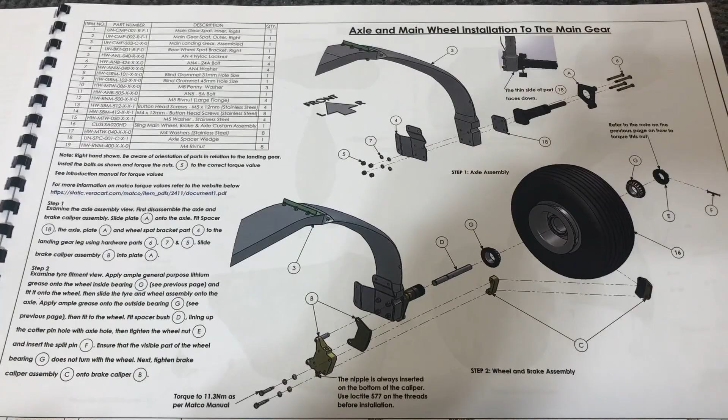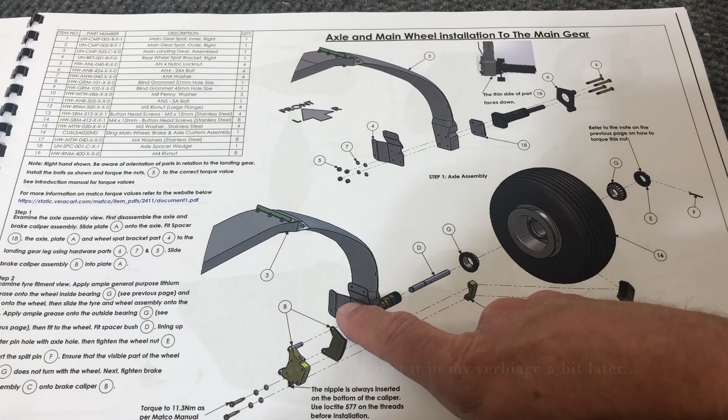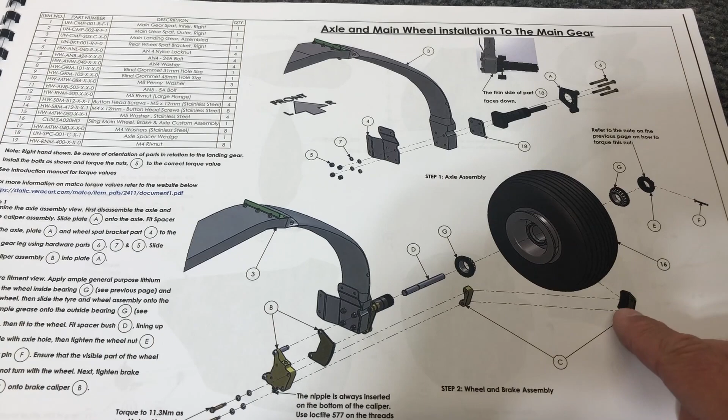So this is what's on the plans currently. This is a Matco wheel that comes with the kit. You can kind of see on here that there's the shaft here, the back portion of the brakes. There's the guide here for the wheel spat, and then the wheel shaft here. There's a bearing. There's a little spacer here for the brakes that goes in there, and then the brake pad itself goes around the brake on the wheel itself. Another bearing, and then the nut that holds it together at the end.

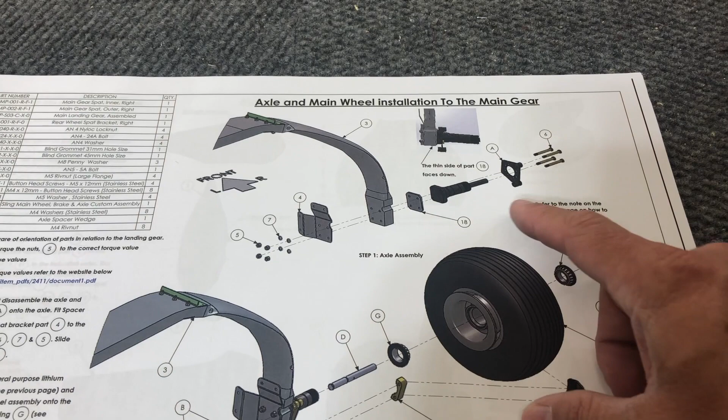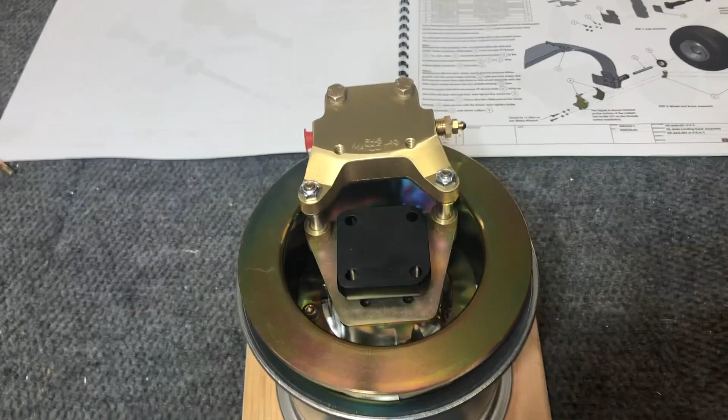This is the center shaft that was represented here, and that goes through all the way to the front, and then the thin piece here actually attaches to the spat on the other side. So that's what the instructions are. This is what the actual wheel looks like. So this is the brake here, or the disc here, and then the actual brake pads and whatnot are in there.

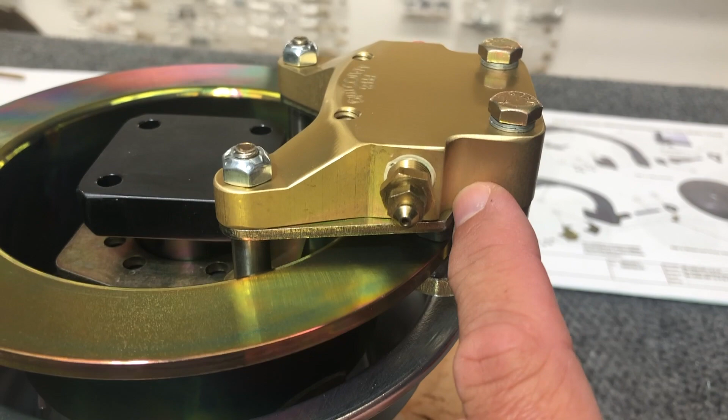And there's several pieces to this. So there's the bottom piece, this little shim that goes in there, and then the top portion of the brake. It does have this guide mechanism that goes in here as well. And then this is the shaft itself. So that's just kind of an overview of the back side of it.

Now I am upgrading to the Beringer wheels for this kit. One of the big advantages is, well, there's quite a few actually, but one of the things I do like is that this wheel uses an inner tube, as opposed to the Beringer one is a tubeless. So that's a big one right there for me. So it's just one more thing that doesn't have to wear out.

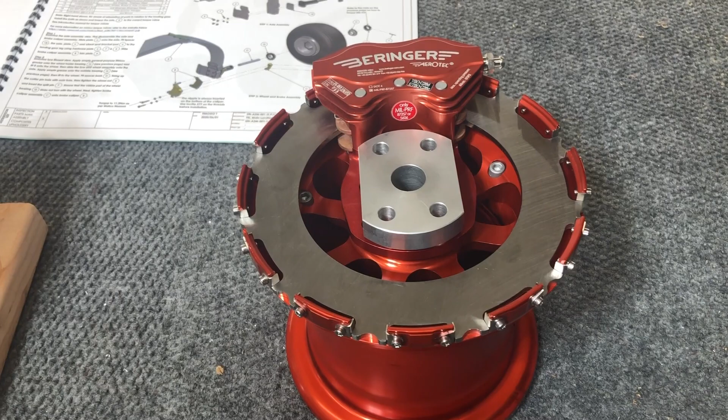So let's take a look over here at the Beringer, and this is what the Beringer wheel looks like. You can see it's kind of different straight away. So the braking mechanism here kind of floats on top like it does here. The shaft, however, is a little different on how it goes together, and then this is the brake disc itself. So I'll take a little bit of this apart. I have to stop the camera here, but I'll take it apart and kind of compare the pieces as it goes down the line.

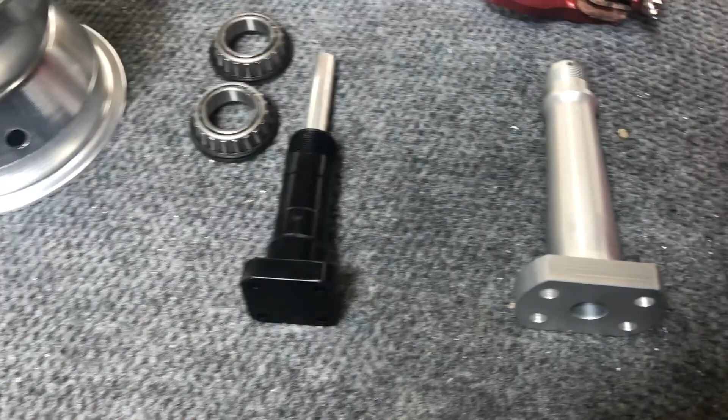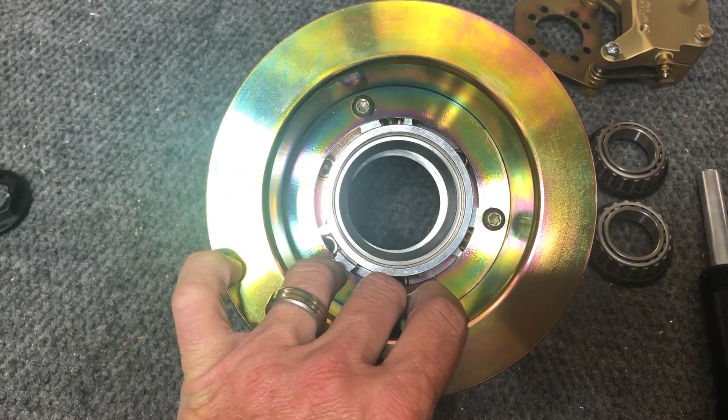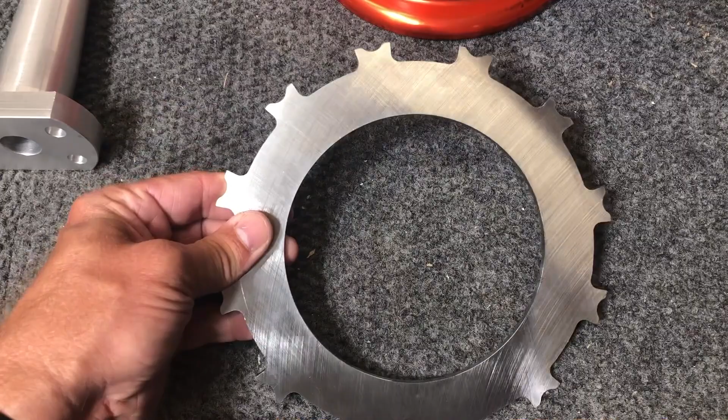Okay, so I've got the wheel disassembled a little bit here. So these are all the parts. The wheel does come apart a little bit more. There's some bolts that hold the two halves together, and I'm just not taking it apart for this particular purpose. But this is the disc where the brake is actually compressing against, as opposed to the Beringer one. This part is actually independent and sets just kind of down inside those openings, just like that.

So if we take a look at the size of the disc here, let's compare the two. This is the Matco one underneath and the Beringer one underneath. So you can kind of see, it's a little tough to see in the video, but the size of the disc is actually much larger on the Beringer one than on the Matco.

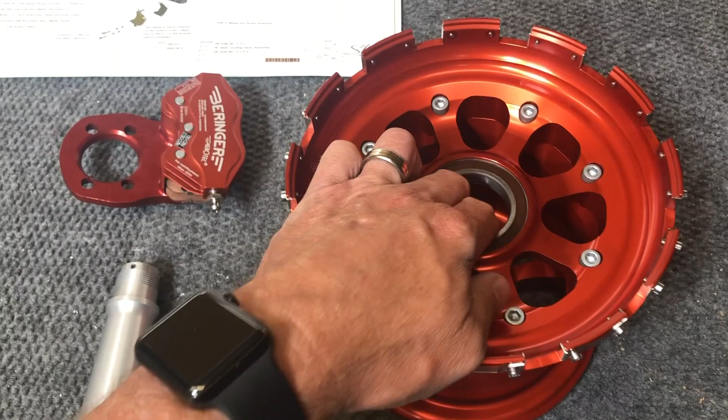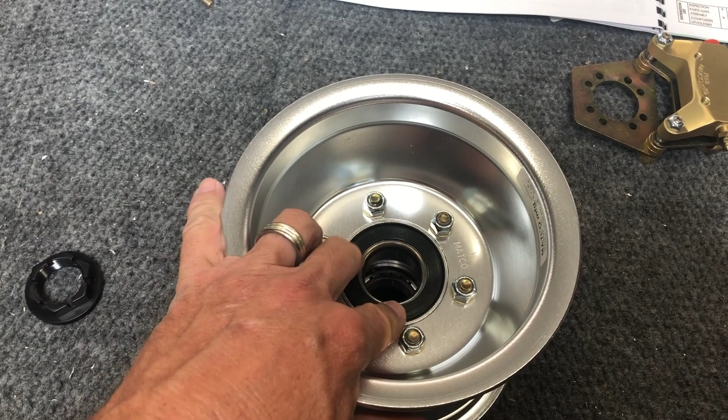Another thing that's really kind of interesting is that the Beringer actually uses sealed bearings as part of their bearings for the wheel itself. And the Matco ones have unsealed ones, so basically, one goes in this side here, and when you turn it over, there's another set of bearings that go in this side here, and then that forms that. Just seems to me like that is a potential for dirt and some extra wear on that wheel that you might not normally get with the sealed bearings.

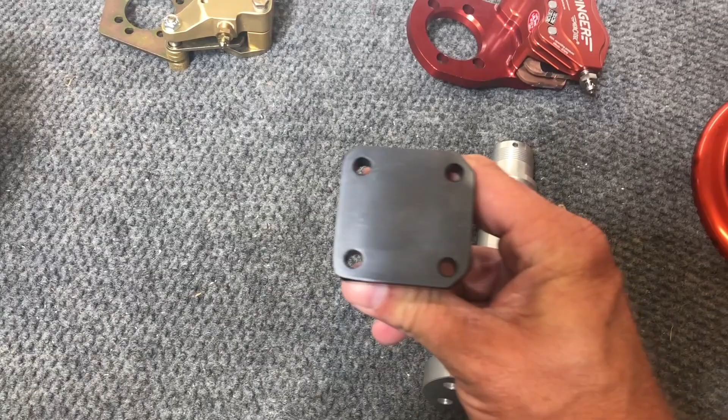Probably one of the things that's most pronounced is the size of the wheel shaft itself. So this is the Matco one here, and then this is the Beringer one. This does introduce a little bit of a problem, because if you look at the end here, this is a square end here, and then this is a rectangle one. The other thing to notice is that the hole sizes for the bolts are significantly different.

When we look at the actual bolts themselves, so this is the bolt for the Matco, and I'm probably putting it in the wrong side, but that's the bolt that would go in those particular holes.

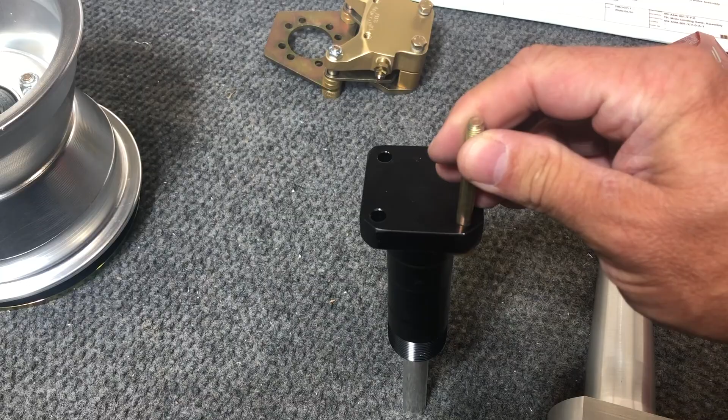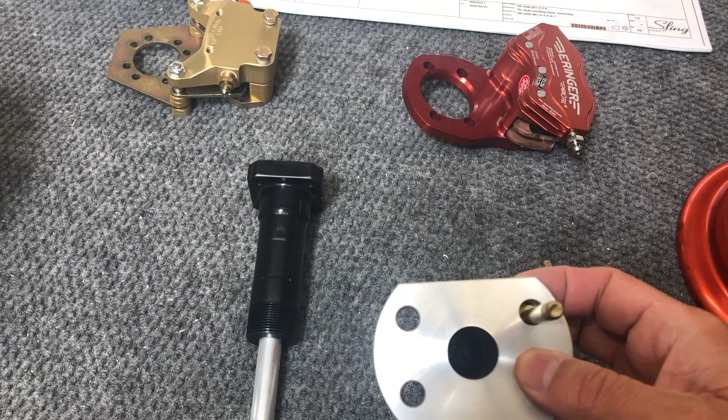So I am going to have to upsize my bolts because these are significantly bigger. I haven't measured them yet, but it's probably an AN5 bolt or something like that. I think these are AN4s. It might be even an AN6 bolt. But anyway, the bolts that the axle attaches with are much larger.

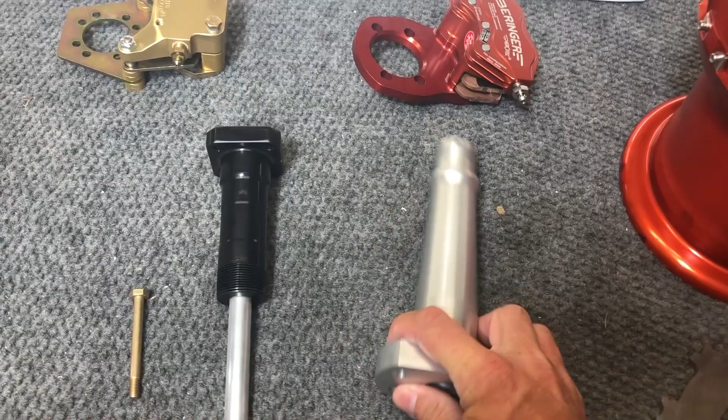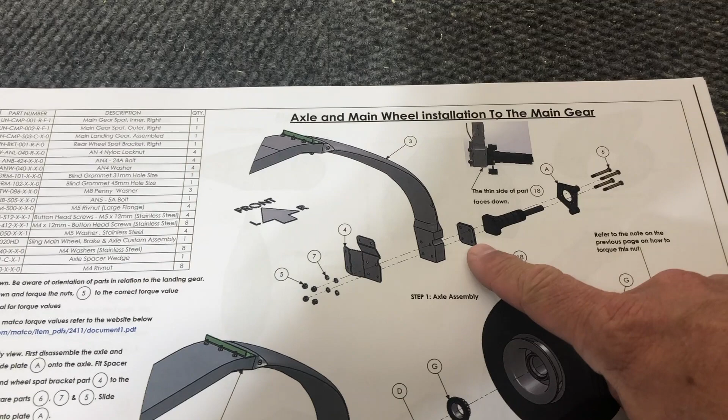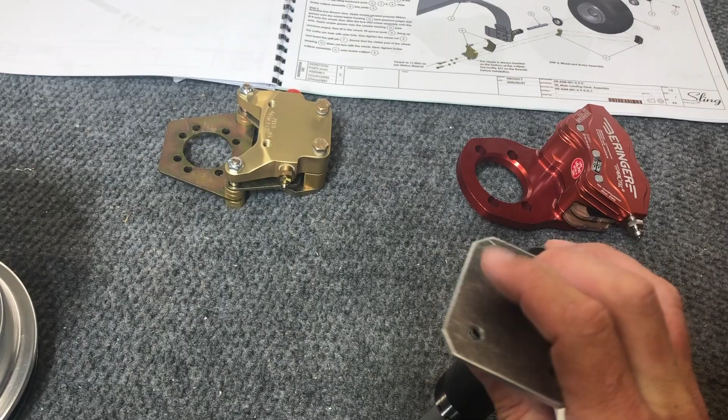Now it does introduce another little issue that has to be addressed. On the plans, if we look here, there's this shim that has to go between the main landing gear and the axle itself. It's a rectangle and it's going to have holes that match up to the size of the bolts. And so that's not going to work, because if I put the square piece on the rectangle piece, I don't have enough to cover this distance.

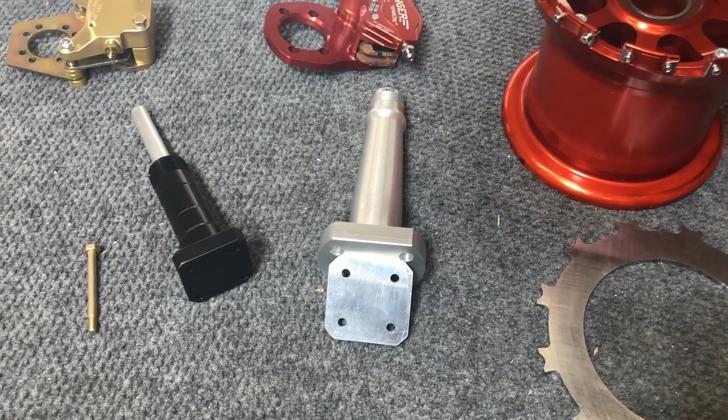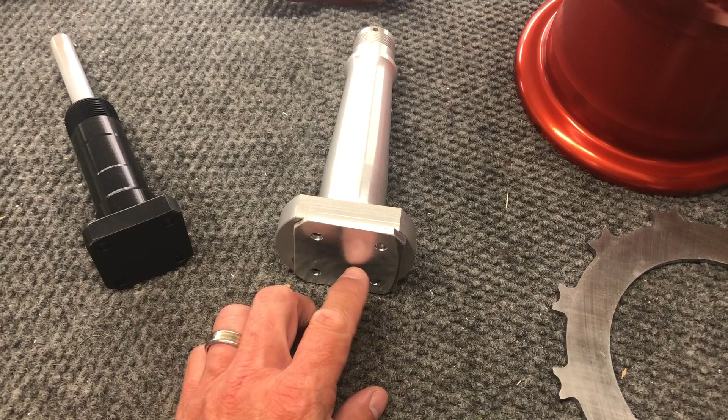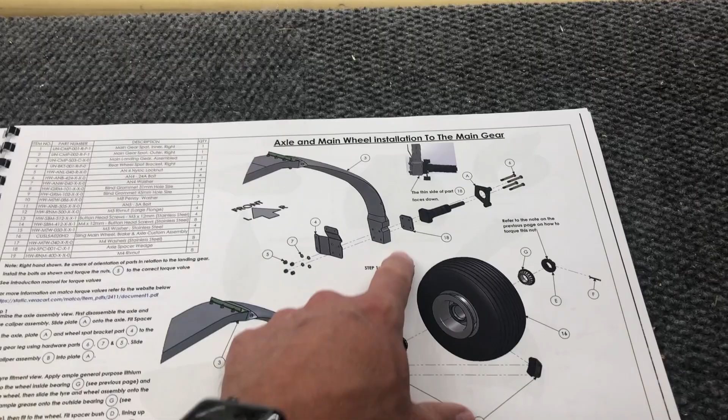So I've reached out to a local machine shop. The guy's actually GA experimental friendly, and he's in the process of milling me a piece. There is a bevel on this too, so he's milling a piece at the same gradient as the bevel, in a rectangle with matching holes. This is actually kind of important because there's a camber on the axle itself. So that's another aspect of it.

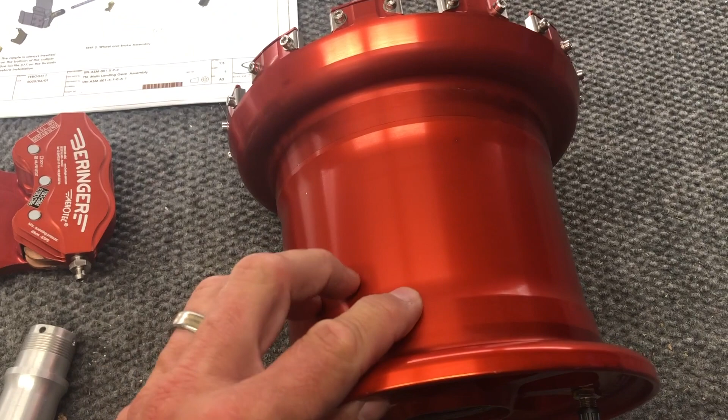The bolts here come apart so you can get the actual wheel on. Very similar over here, but because it's tubeless, it's very difficult to see. I'll take it apart so you can see, but there's actually a seam right here. You remove these 10 bolts, and then this section comes off, and it has a rubber O-ring that seals the two together,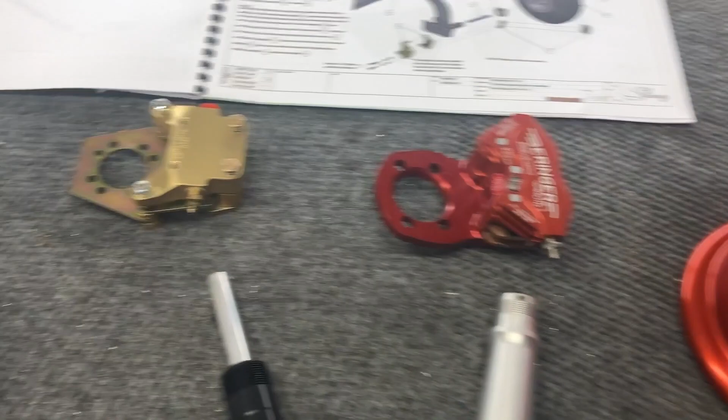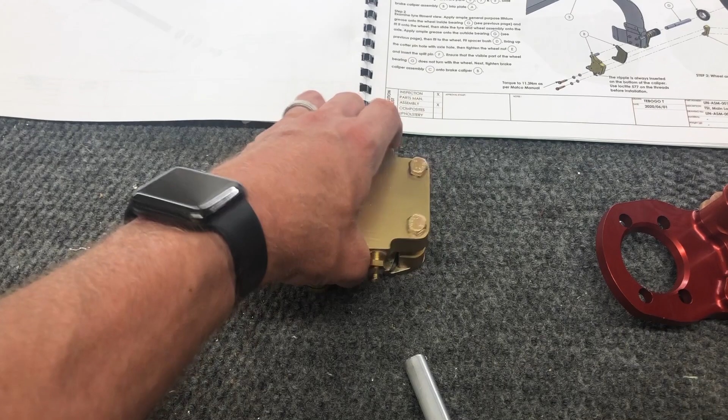These are the bolts that hold together the top portion of the brake. When we take this apart, we've got this section with those bolts, this plate that has the top brake on it, the bottom plate, the shim between the two, and then the part that holds it on the center of the axle. So there's quite a few parts you have to mess with to do the brakes, though I'm sure you'd probably get pretty quick at it.

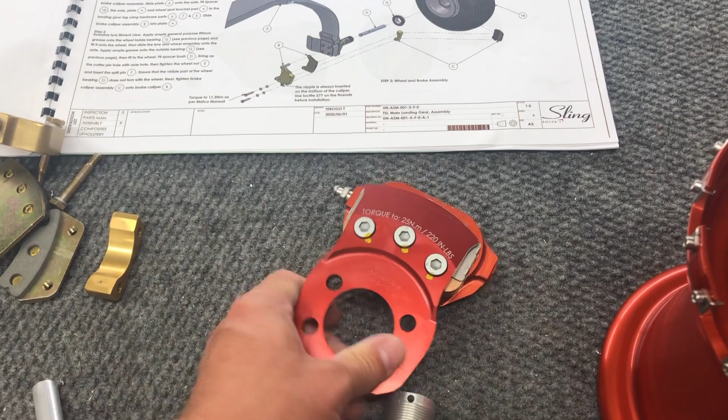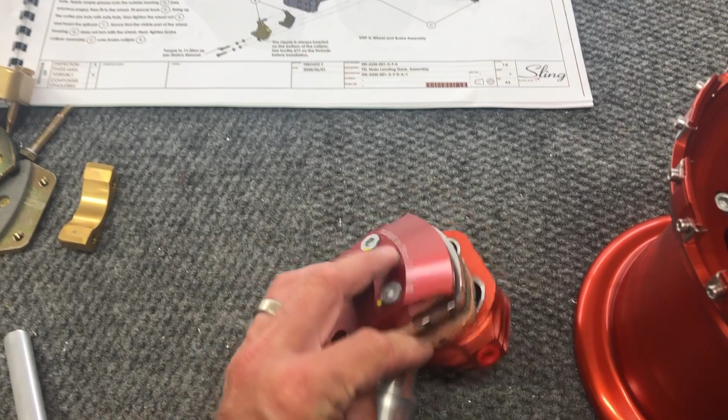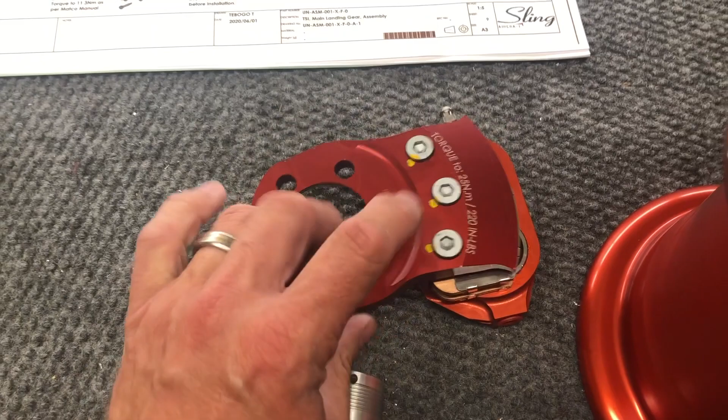With the Beringer, this is actually pretty cool. I stopped by the booth at Oshkosh this year and talked to them about it. You only have to remove one of these two bolts. I have not taken that out yet, but the way they've got their brakes designed, you can kind of see it in there, the brake actually has like a shim in it, or a catch. So if you take this bolt out, the brakes come out. Changing the brakes is just a matter of removing one of these bolts, so putting it back together is pretty straightforward.

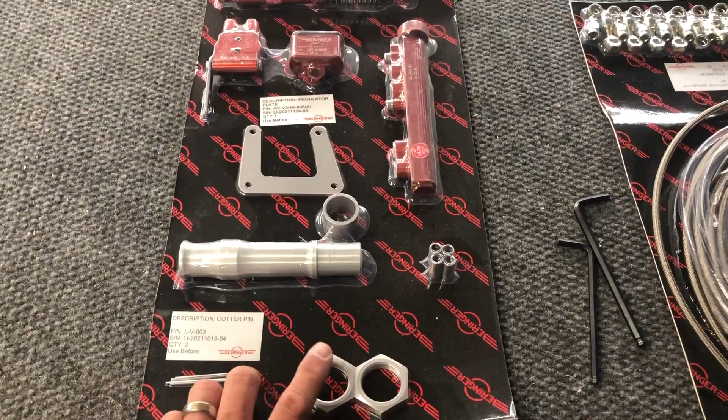Basically, this part goes on here, and it's difficult to do with just one hand, but that goes on there, and then the shaft will go through, and I'll put it back together in a second and show you the other part on the mains. The other part that comes with the kit is the axle for the front wheel, and all of the brake systems.

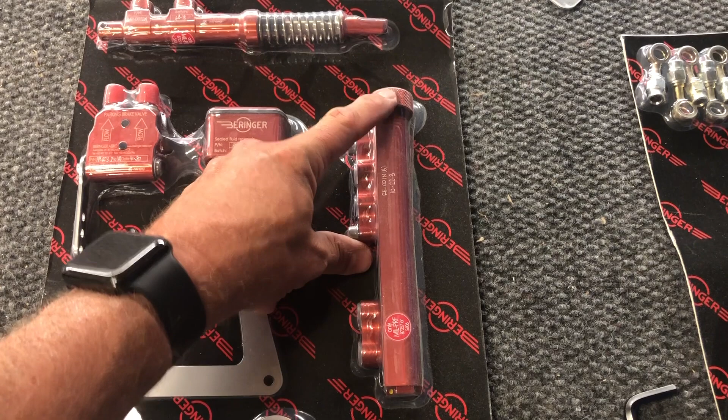One thing that's also very cool is this piece here; they've engineered it so that it's a dampener. I'm going to call it a dampener, but they call it an anti-lock brake system. You fly it for a little bit, then you do a full power test where the wheels are completely locked up, and then you loosen this up enough so it's right at the edge, so the wheels lock and hold, but they won't lock up if you had a differing surface, like a wet surface, or landing on a runway that's got some ice on one side.

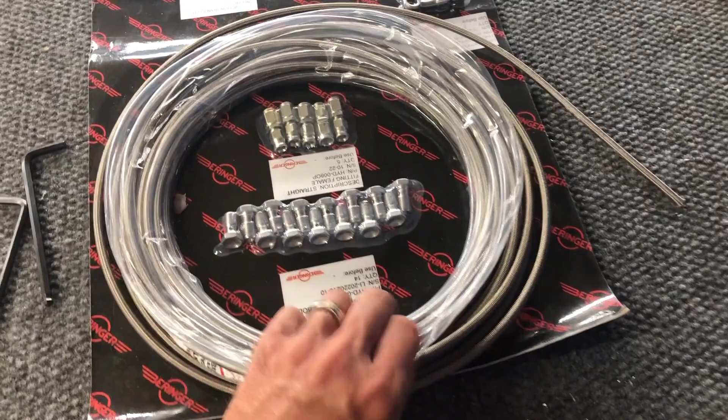So they call it an anti-lock braking system. I have not tested it, so I'm not exactly sure how well it works, but I believe that it's probably going to be pretty good. The other thing that it comes with is some steel braided brake hoses, and I did check.

This does fit inside the little channel that comes with the landing gear, and then it comes with all the bolts and the connectors and some of the other parts that go along with it. So I haven't gotten too far into that yet, but since I'm just back from Oshkosh, I'm reaching out to the guy that did the milling for this shim, and he said probably by the end of the week, this first week in August, I should have those.

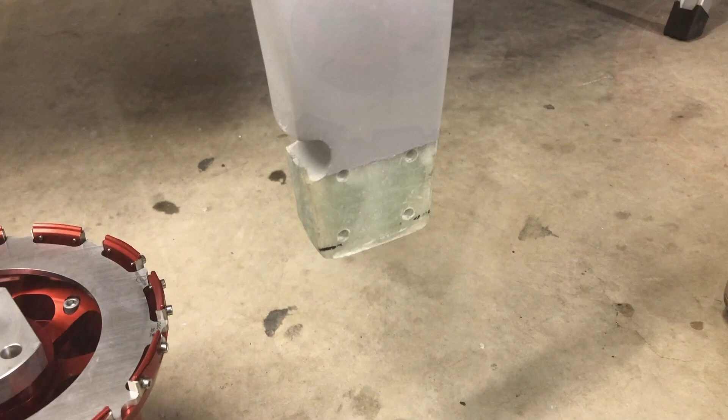So let's take a look at the main gear itself, so you can kind of see what I'm up against here. All right, so I'm down at almost where the landing gear level's at. The airplane's still up on sawhorses at this point in time. So the landing gear from Sling comes with the holes pre-drilled for the Matco.

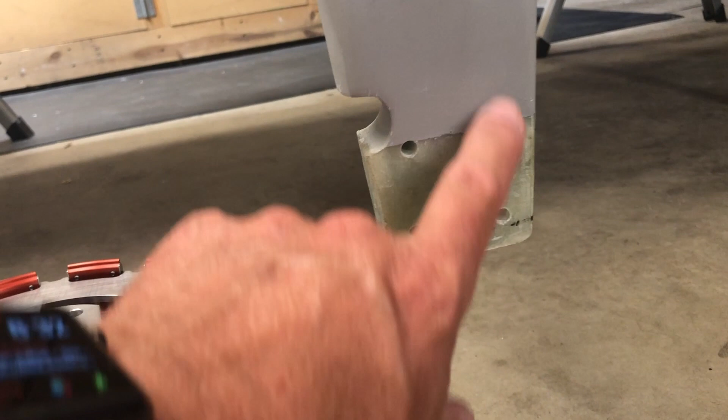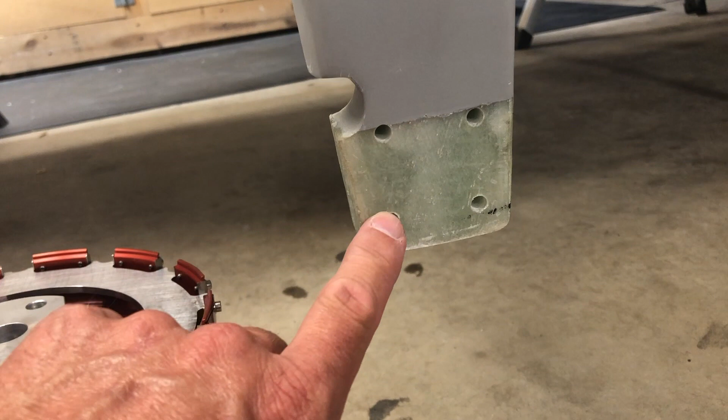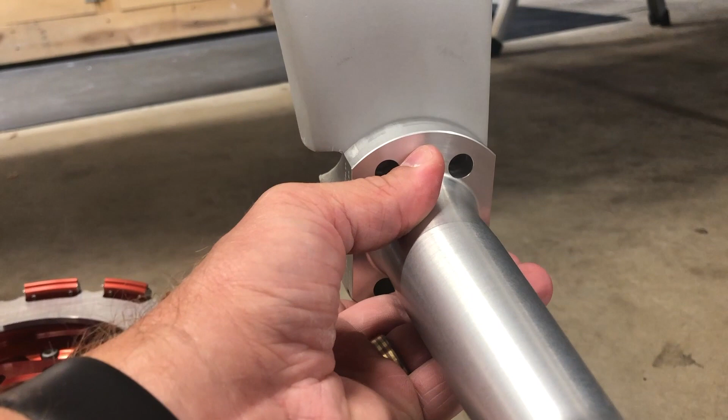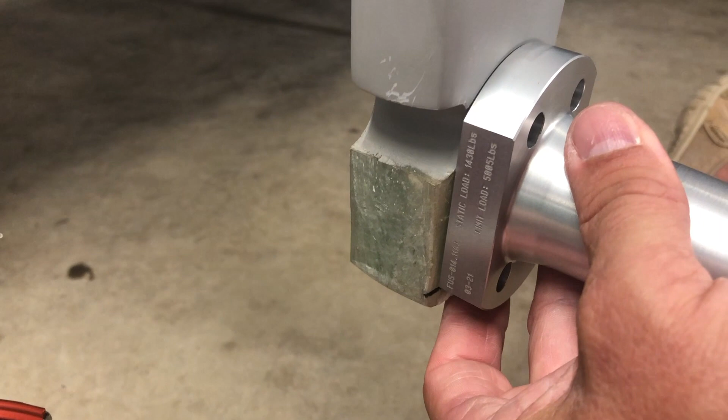So to get around that, what I'm going to do is backfill these holes with the fiberglass epoxy compound, which will basically reinforce these holes. And once that's done, then I will drill out the holes necessary to match the new landing gear mount, which will be pretty close to about there. So basically the bottom of this is going to be just about in line with the actual bottom of the gear itself.

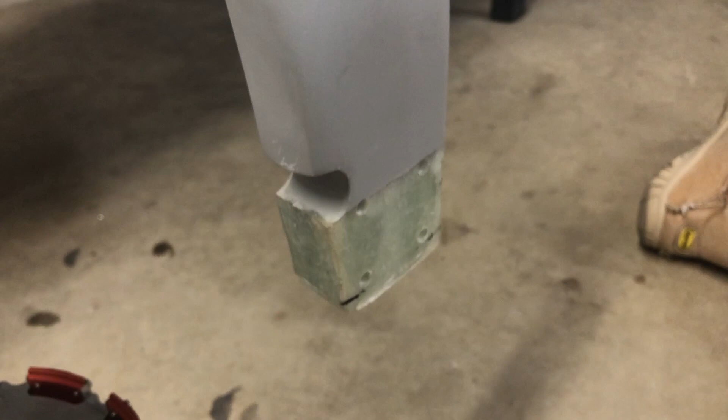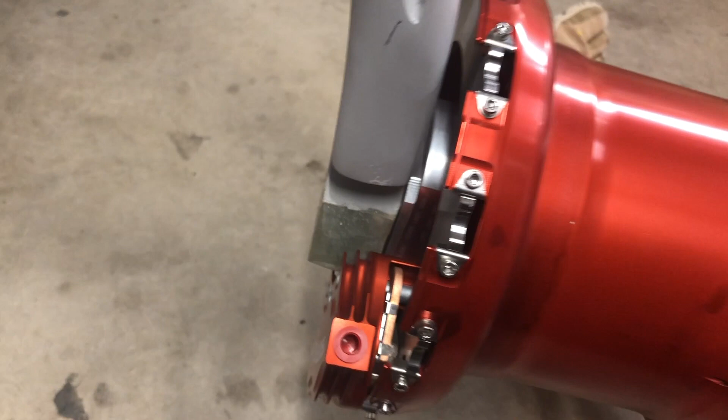So this cutout right here serves a purpose for the Matco, but I don't necessarily need it for this particular installation. So put the wheel back in there, and we'll look at it. So this is pretty close to how it's going to be. I've just got the square shim being held in there right now, and you can see I've got quite a bit of clearance here on this side. This is the disc side, and then the brake mechanism is down there. So it's going to be about how it goes in there.

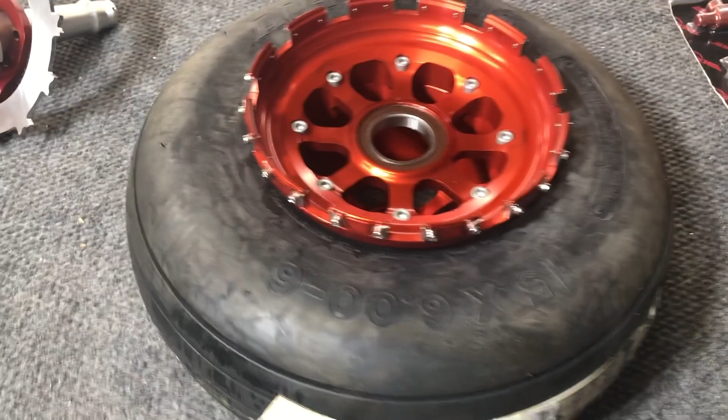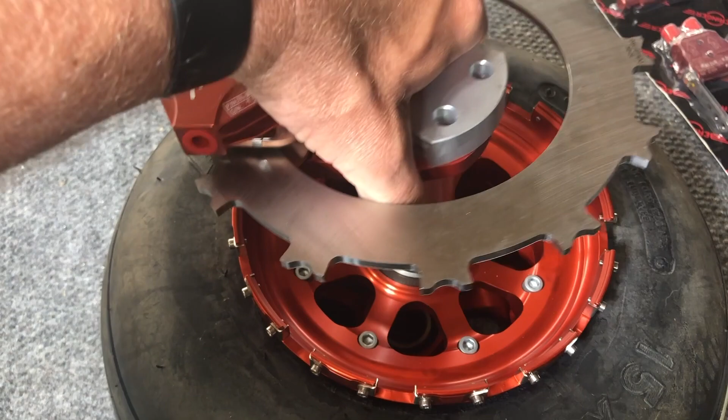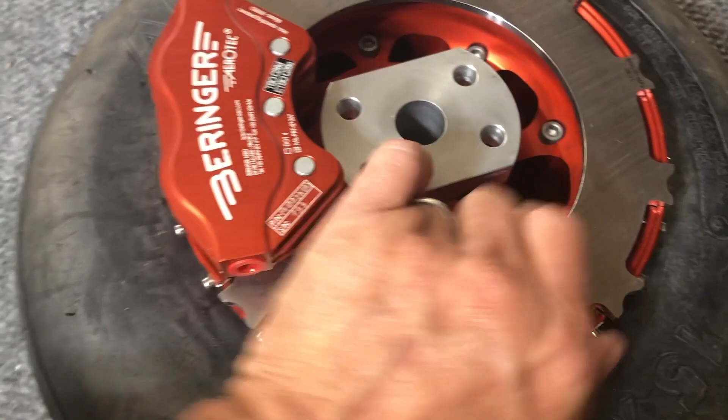All right, so I've got that bolted back down. I don't have any air in the tire yet, but once you put a little bit of air into it, the seal on the bead for the tire just comes right up. When I go to put this back on the airframe, if the shaft is already on there, this part will go on, the brake, and then the little teeth go in. Yep, so I just grabbed it again, and it just sat right on there, so those teeth just go right inside.

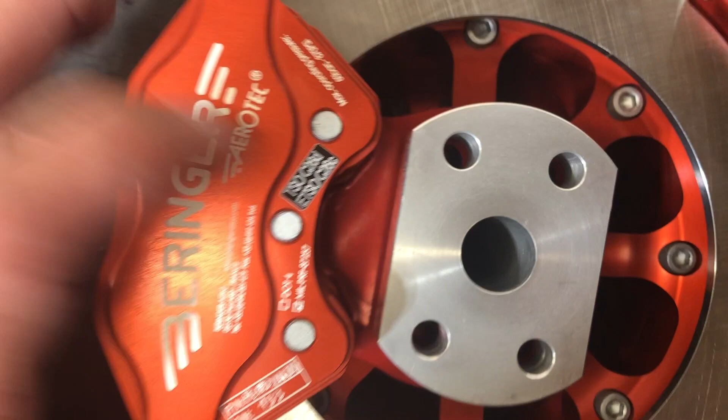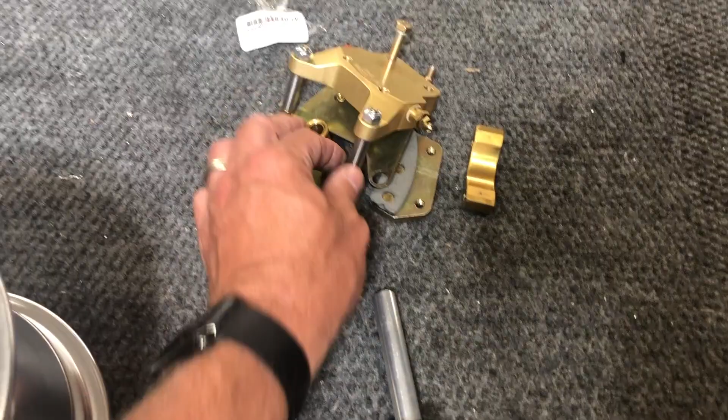The bolts will line up with the brake itself. Gotta find the center on it here, there we go. So those bolts hold the brake in place with the axle that's going to be bolted onto the landing gear itself, so that all keeps it there. So it's basically like 1, 2, 3 parts, as opposed to all of this over here with all these different little parts. And the brake pads are actually significantly bigger on the Beringer.

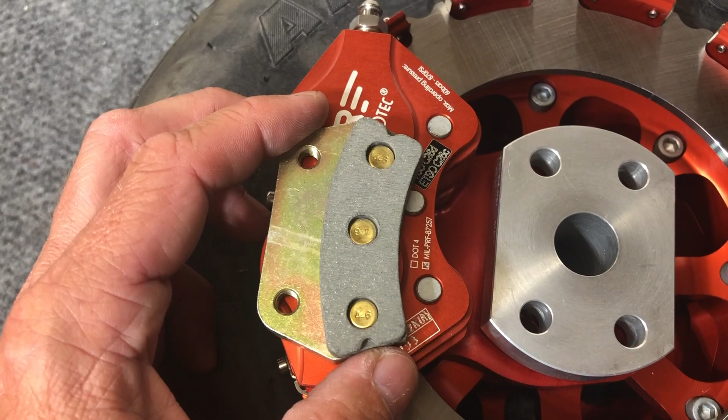So if you look at the size here, the brake pads run pretty much side to side. It's a little difficult to tell in the video, but even with a little bit of play in there, there's probably another inch or so extra brake pad that's on the Beringer. Anyway, so that is my overview of the differences between the Matco and the Beringer brakes.

The one thing that I thought was really interesting was I was chatting with the Beringer folks at Oshkosh, and this isn't official or anything like that. I can't speak for Sling, but they did say that there is consideration for Sling to be moving to the Beringer brakes or Beringer wheels, or at least have that as an option going forward. The Sling high wings that just flew over from South Africa had those wheels on the plane itself, and that came from the factory. So there might be a change coming soon from Sling, but this is just my overview and the reasons why I'm going with these wheels instead of the Matco.